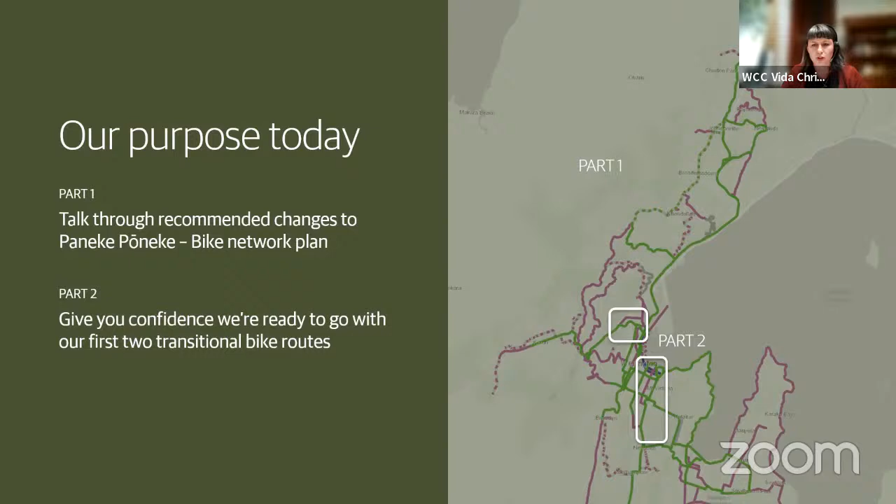So I just wanted to frame that a little bit before we get in. Ollie, if we can go to the next slide please. So as I said, the first part is around the whole bike network and the strategic document that has been in consultation. The second part of the presentation will zoom in on the 2 transition projects.

Next slide please. On the 10th of March, we'll be coming back to the Planning and Environment Committee with the finalised bike network plan for adoption, a connected network for people to bike and scoot around the city. This plan is a delivery mechanism for a number of the key strategies you have set for the city and the region over the last 3 years.

So just quickly to touch on a few of them, we know that 34% of our emissions come from our transport network. If our Te Atakura targets are to be met, creating safe and viable low carbon transport alternatives is essential, and it's one of the most effective tools we have in our toolbox to be carbon neutral by 2050.

In 2019, we approved the Bike Network Bus Priority Action Plan. One of our key actions was to install bus lanes. It makes sense to install these at the same time as we install bike lanes, and later you'll see in this presentation when Claire takes you through the transition projects that we're proposing to use this. The parking policy set the hierarchy for how our street space should be used and prioritised through the different types of streets, and this will be really, really important as the city grows.

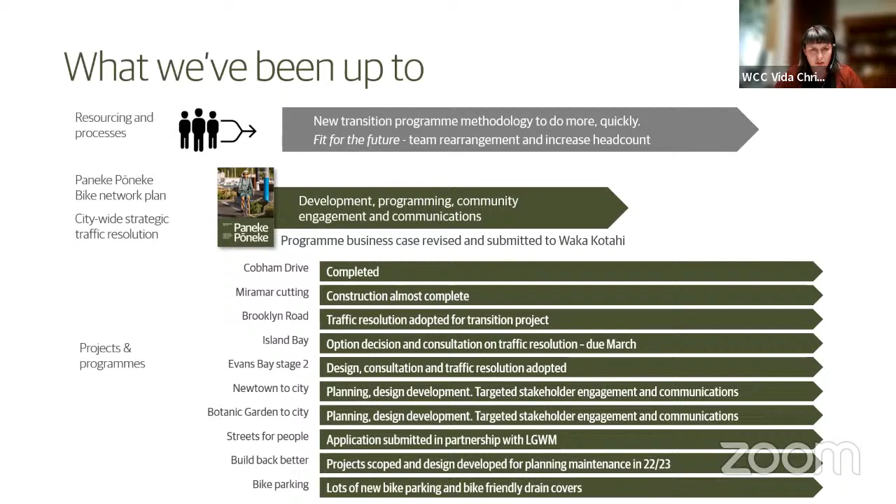And lastly, we have also continued to deliver all of our projects and programmes, and kicked off these first two transitional routes, which Claire will speak to. I'll now hand over to Joe, who will take you through the consultation and bike network changes.

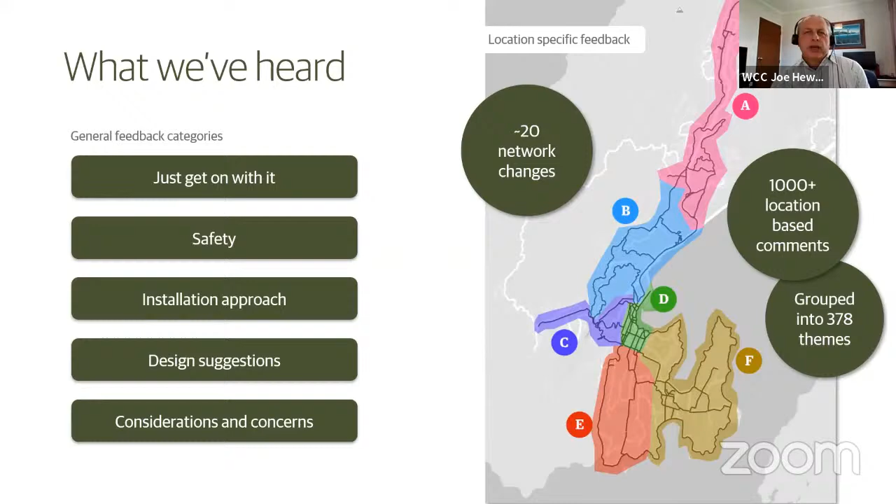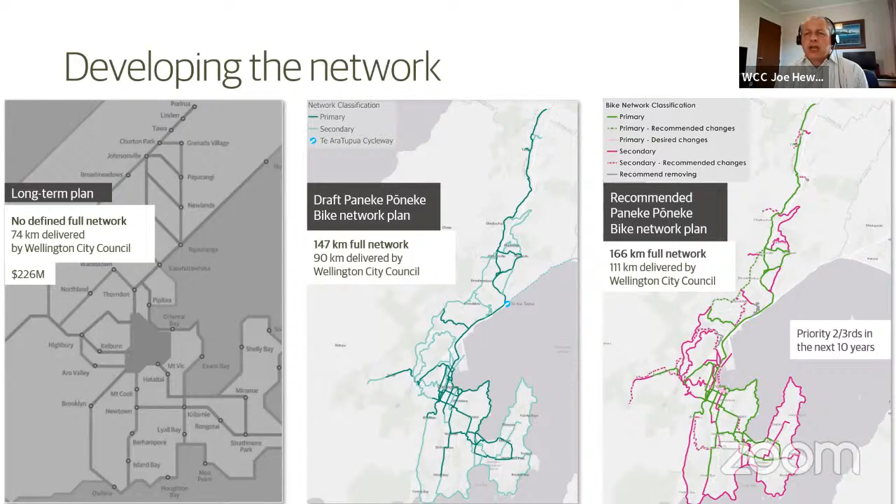Part of the decision for LTP was to refresh the master plan, through which we defined the strategic bike network, with a centerline length of 147 kilometres, of which we thought 90 kilometres would need to be delivered by the City Council, as contained in the consultation document. Our current thinking, based on recommended changes from feedback, is that the strategic network length goes from 147 to 166 kilometres, with the council responsible for about 111 kilometres. At current funding levels, about two-thirds of that network can be delivered over the next 10 years. Next slide, please.

So just breaking that down, you'll be a little bit familiar with this slide. It's a slight variation from the one you've seen before, included in the bike network plan. From the top, we've changed the built or being built from 23 kilometres down to 22 kilometres, reflecting that part around the parade needs to be upgraded. There was strong submissions about the need to provide separated facilities, particularly in busy pedestrian areas, and big shared spaces aren't by any means ideal. So that's been acknowledged, causing a change in that statistic.

In working more closely with Let's Get Wellington Moving, and now that the City Streets program is defined, we have refined the responsibility for Let's Get Wellington Moving, which still assumes the City Streets program, MRT, and strategic highways components will be responsible for delivering parts of this network as part of the Let's Get Wellington Moving program. So it's now 33 kilometres, and that leaves the remainder 111 kilometres for the City Council.

So working through the recommended changes from the top at a high level, there's some relatively minor changes around the Tawa Town Centre, where the proposed primary network was going via the existing Te Araroa pathway through Grasslees Reserve. In response to submissions, we're now recommending that it stay north on the street to get closer to the entrance of the college and the intermediate school, and also provide a secondary connection from that Grasslees Reserve area, Tawa Pool, back to the town centre.

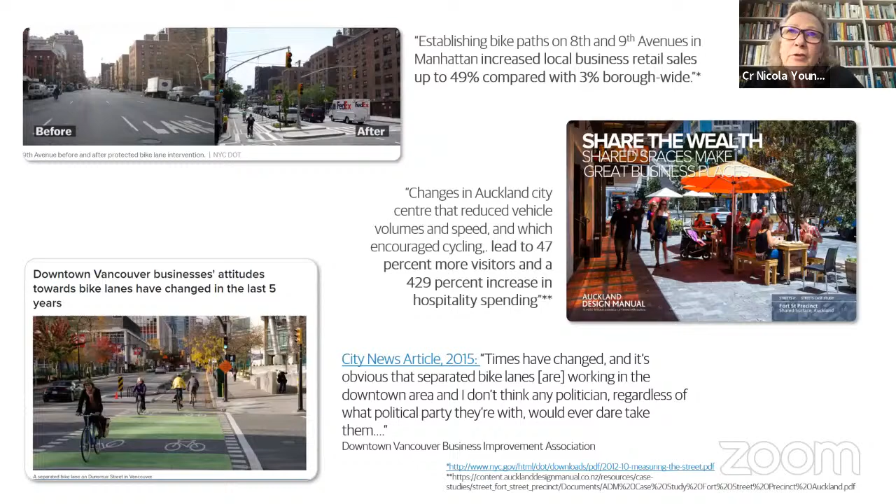I know there've been a lot of question marks about the veracity of that previously. I just find it impossible to believe that 76%, when you consider the age profile of our city — I think it's a nonsense. However, just to clarify, what it's saying is that 76% said they would use cycling more for some trips, some of the time, if good, safe infrastructure was provided. It's not saying that three-quarters of people are suddenly going to take up cycling for everything — there's no way it should be interpreted that way. But it's saying there's significant potential for more people to use bikes for some trips, some of the time.

So would it be more accurate to say would consider occasional cycling? I don't think that's what Mr. Hewitt said. Councillor, can I just ask you to moderate your language a little bit when officers are presenting? Thank you. What's immoderate about that? Just a few of your comments. Have you got any other questions? Nope, that's it. Thank you.

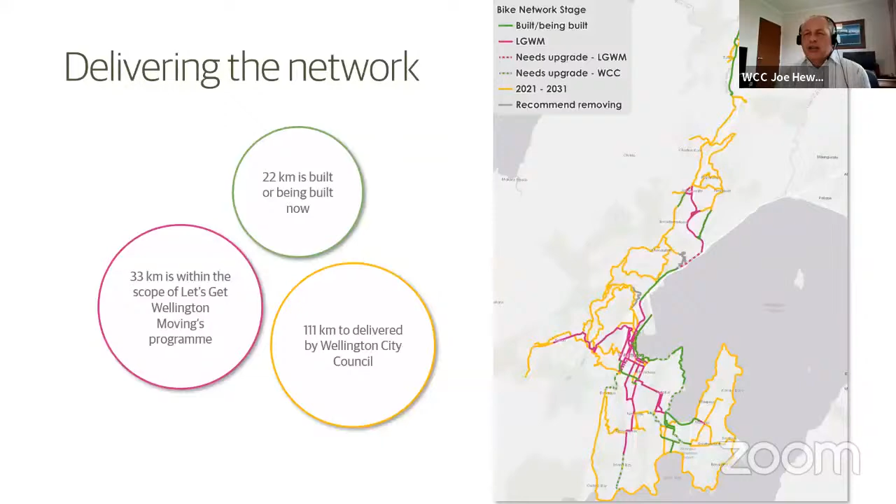Is that going to be significant? Yes, at this stage that is a significant potential cost increase. So you'll need to come back to us with that. We've identified the cost in the paper. You're quite quiet on that particular point.

There was additional cost because, of course, there are additional cycleways that we've added as part of the consultation feedback. But we've got more than enough to do with the budget you've given over the next 10 years - that's the key message. I was just wondering if you'd move things around to accommodate that.

I guess there's a couple of quick answers to that one. In terms of cyclists getting through the bus tunnel on the bus, they can do that - they just have to hang their bike on the front of the bus on the bike racks that are on the front of nearly every bus in the city these days. They're just not allowed to ride their bike through that space because of the safety concerns I've talked about before. In terms of additional connections across Mount Victoria itself, we have identified a potential route from the velodrome area, through across the top, that we are adding to our minor works program for further investigation.

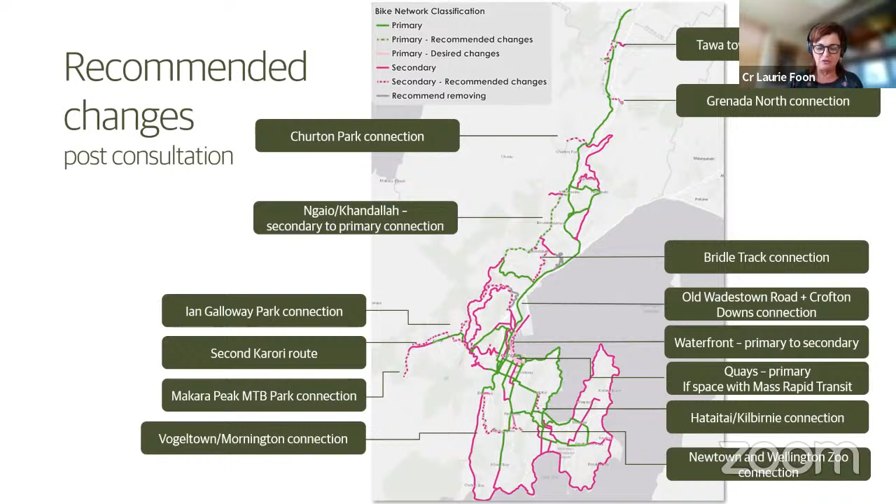Just in regard to Councillor Rush's post there about the survey, I guess one of the questions I've been wanting to ask is has there been any thought to redoing the survey, if we would or wouldn't, or when would we normally review a survey? I think it would be quite good to know - have we given any thought to that, and could anyone give an explanation about what we might do and when we might do it?

Thank you. I guess we've thought about it to the extent that it's probably tens of thousands of dollars to repeat the exercise, and I'm just not seeing the value in that kind of expenditure for something that's not telling us that much.

What we know, and we've seen this in a number of surveys around the place, is that there are different classes of people interested in cycling. At one end of the scale, you've got the fit and the fearless - I like to call them the skinny tire brigade. They'll go anywhere, kind of as fast as they can, often wearing lycra. At the other end of the scale, you've got the no way, no how people, and they're kind of a quarter to a third of people who, for whatever reason, are just not interested in cycling.

And then you've got a range of groups in the middle, which broadly we call the interested and concerned. They're the target market in terms of developing cycleways for. The safer we can make them, the more connected we can make them, the more we can attract people of that segment, which is perhaps over a third of the population. The more of those people we can attract to it, to free up space on the bus, to use their cars less for health benefits and for carbon CO2 reduction benefits, the better - that's the target market.

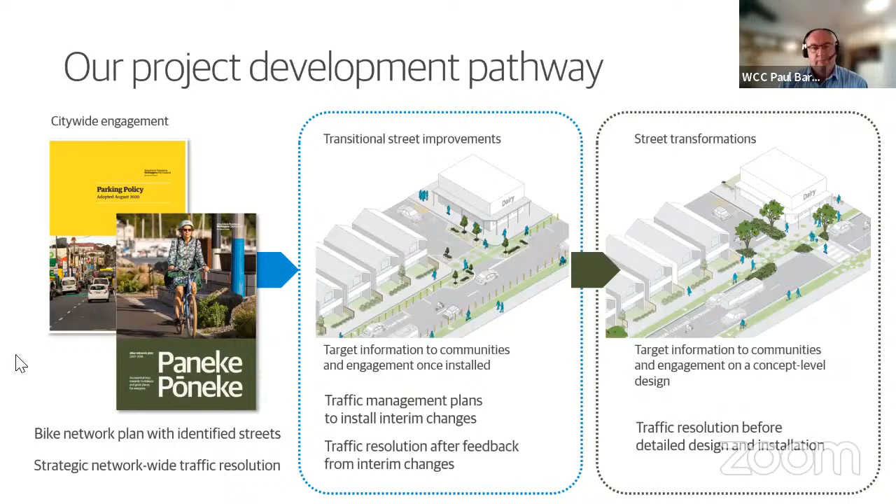Whereas the street transformation projects are almost the other way around: we come up with a design, get options from the community, and approve the paper version before we put anything out on the street. Now, by doing it this way, when we're doing the transformation, we're not starting from scratch. We're able to build upon the work that was done previously.

When we go through the program, you'll start to see that in some cases, the gap between the transitional program and the transformation program could be some years. You'll see in Brooklyn Hill, we've finished that work. We hope to get the transformation project out next year, so it's going to be about 18 months that'll be in place before we'd follow up with the long-term changes. But in some of the network, it could be 4 to 5 years that the transitional was in place before the transformation project follows through.

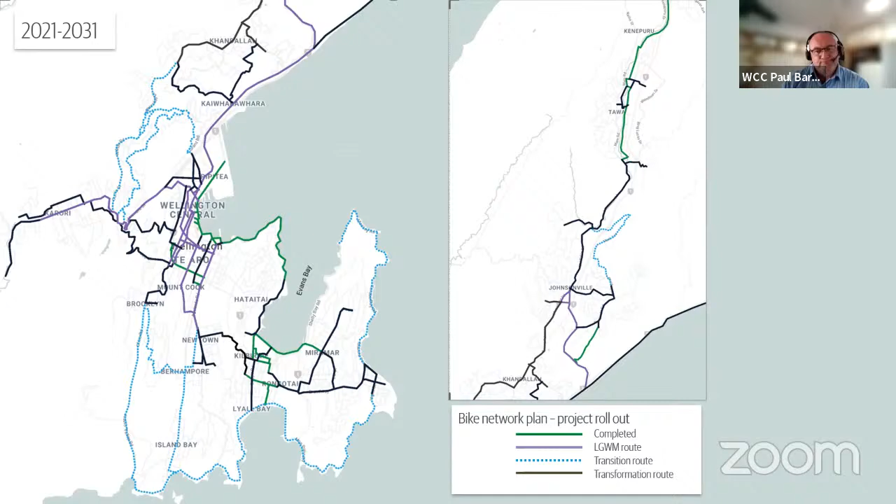Cool, just go forward those 2 more slides, Ollie. So that was the how we're doing it, and now this is sort of when, and there's a lot to unpack here. We've broken these down into about 13 areas, but within that we've projectized 62 projects across the whole city over the next period of time.

We've tried to show that the blue, the transitional program, which Claire will talk about, will get it almost all done within 3 years. There's a couple of projects that slip out beyond that 3-year program where we talked about getting it all in within 3. And you can start to see the transformational program, which is larger, more expensive, more labour intensive in terms of our contractors and our design process.

Our consultation process will take longer. And as we get further into the program, that gap between the transitional and transformational just becomes larger.

While we've tried to roll this up to area-wide, the projects that sit below it are all subject to change. Joe touched upon that in his presentation - we haven't tested yet with our partners, we haven't tested with the other service authorities the assumptions that we've made that we can get into a bit of the network. We'll have a 12-month window to build, which may be shot to pieces once we explore who else is planning on being in that bit of the network at that time.

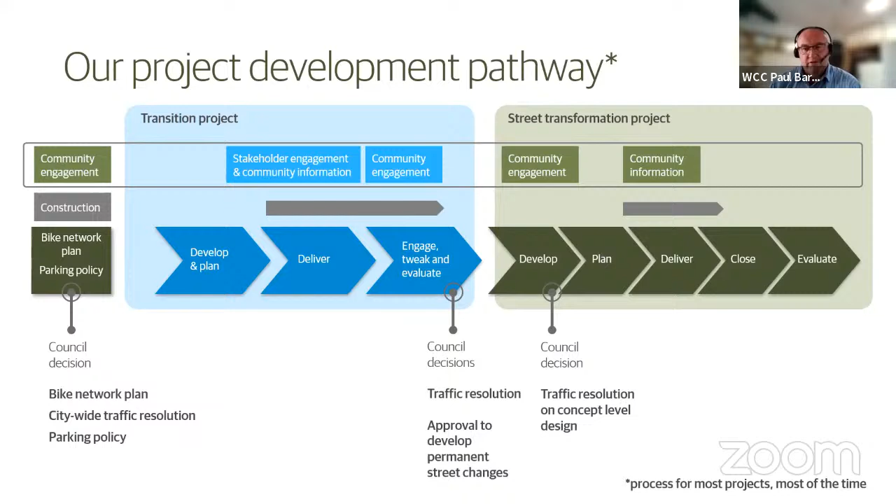There's lots of information on that. We've done a lot of work here at a strategic model level. We've built a model, and in that we've put some penalties for uptake based on gradients. That's helped us calculate the level of uptake, and even on some of our steeper parts of the network, applying those penalties, we still believe it's a worthwhile improvement, that the uptake is such that it will meet the objectives of moving us in the direction we want to go. But I will respond with a fuller response directly to Councillor Rush.

I presume keep practicing is also helpful to get better at those slopes. Right, yeah, e-bikes have made a massive difference on slopes.

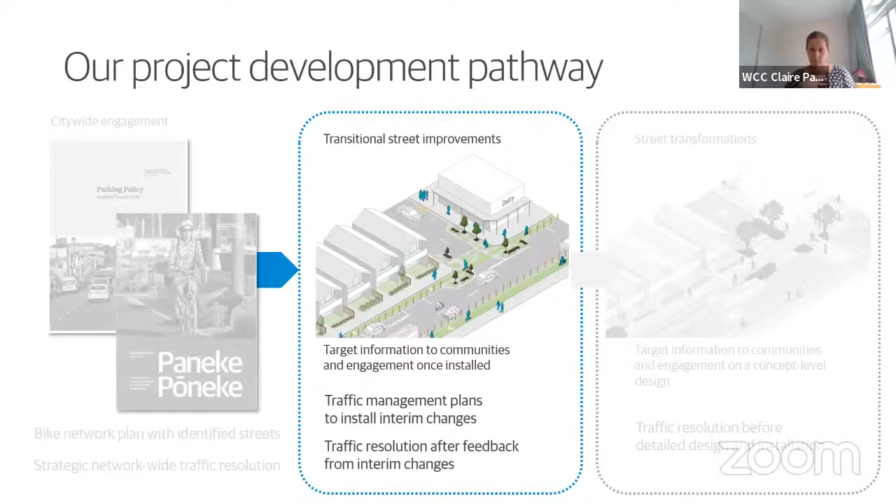But we're also delivering some good multimodal benefits through these designs, including some bus lane improvements and benefits for pedestrians who get particularly frustrated when bikes and scooters use the footpath. So creating the space to get them off the footpath is a key benefit for pedestrians.

Given that we are working in this transitional way and looking to avoid moving curbs, which is expensive and time consuming, we did require some design trade-offs and a few early preparation works, but given the constraints of the corridors, we've tried to make use of every single centimetre of street space.

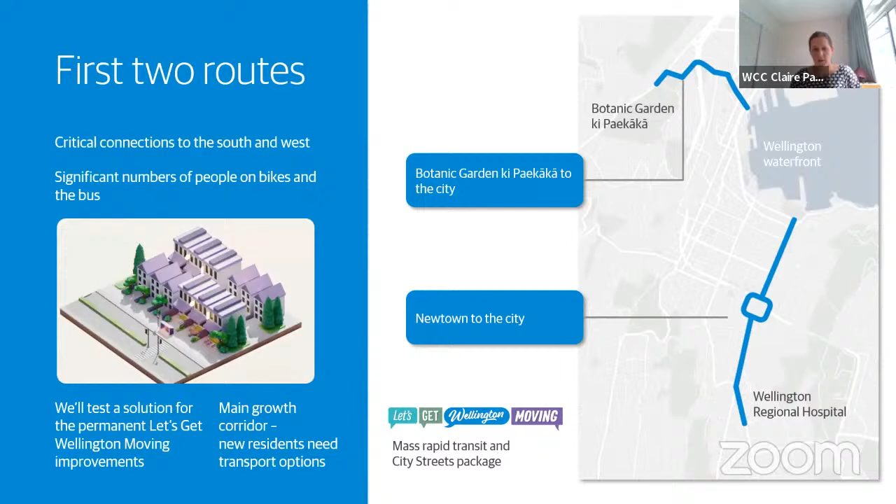A big part of these transitional projects is the data and evidence we collect. We've been pre-collecting data before we put them in, so we can monitor what the change is after we put them in. We've got good information about who's using the corridors, the speeds - we know on Bowen in particular there are some speeding issues on that section of road.

We did a public survey as part of our first phase of engagement, and got 309 responses for this corridor, with two-thirds of people saying they didn't think the street provided for active modes, and also showing pretty low trust in terms of how the council is delivering infrastructure for these modes.

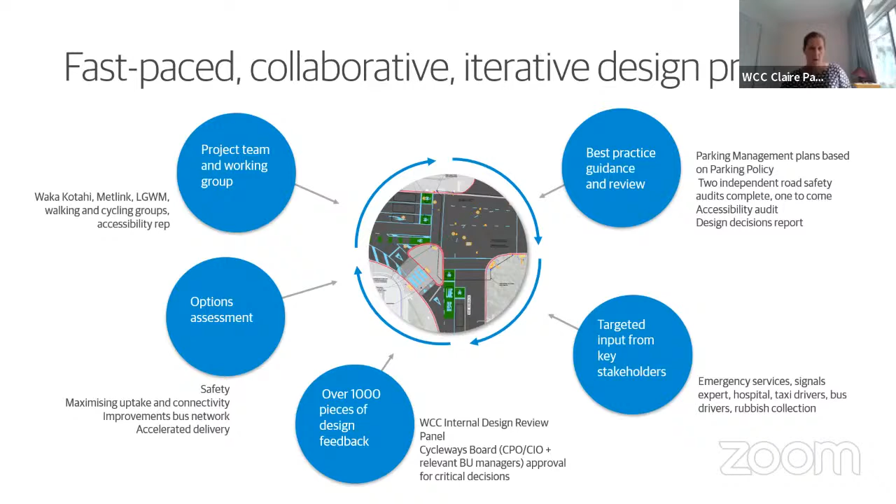So we'll get now into the designs. The first overview is of the Botanic Garden ki Paekākā to the city. This goes from outside the Botanic Gardens down to the waterfront, and it's made up of some different types of facilities.

Coming downhill from Botanic to Lambton Quay is a shared bus bike lane. That was initially going to be a separated bike lane, but some of the comments through the safety reviews have suggested that because the speeds of buses and bikes are more similar on a downhill gradient, it's actually preferred to have them sharing in a space that isn't pinned in. So that's what we will be progressing for this.

And this information again can feed into the permanent upgrades that Let's Get Wellington Moving will be following with. However, we do have a separated cycleway on the uphill from Lambton Quay up to Bowen, and that's primarily because of that speed differential between the vehicles and the bikes.

This intersection at Bowen and the Terrace has significant pedestrian improvements. This was part of the Central City walking improvements, and is introducing a new pedestrian crossing over to Museum Street. It's also raising the pedestrian island on the other side of the street to footpath level, improving comfort and safety for pedestrians.

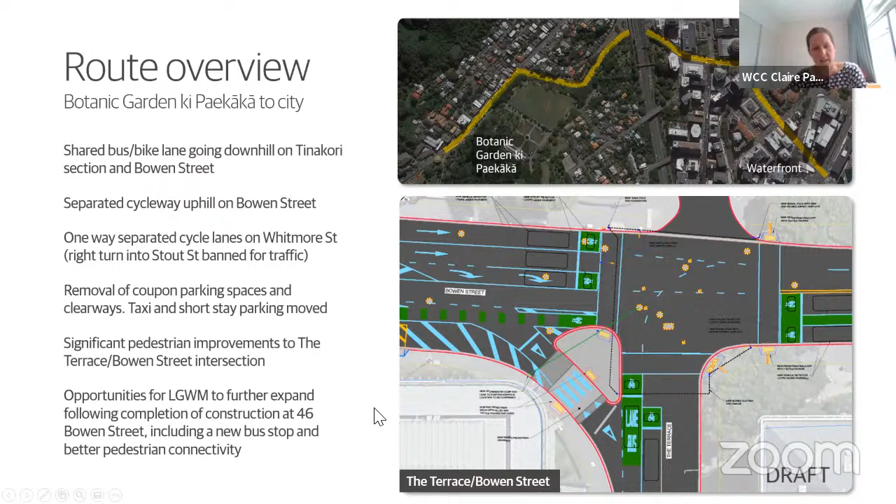This involves some permanent works because it was Let's Get Wellington Moving, but we've taken it over so we can incorporate the bike designs here as well. On Whitmore Street, we are looking at one-way separated cycleways on both sides, so we can take you through some images now.

So this is the top section, Tinakori Road. You can see the separated bike lane going up and then a shared lane coming down. It's a little unclear in the background, but there's a vehicle lane and a shared bike lane going down. This bus border—we'll talk about this in more detail later—

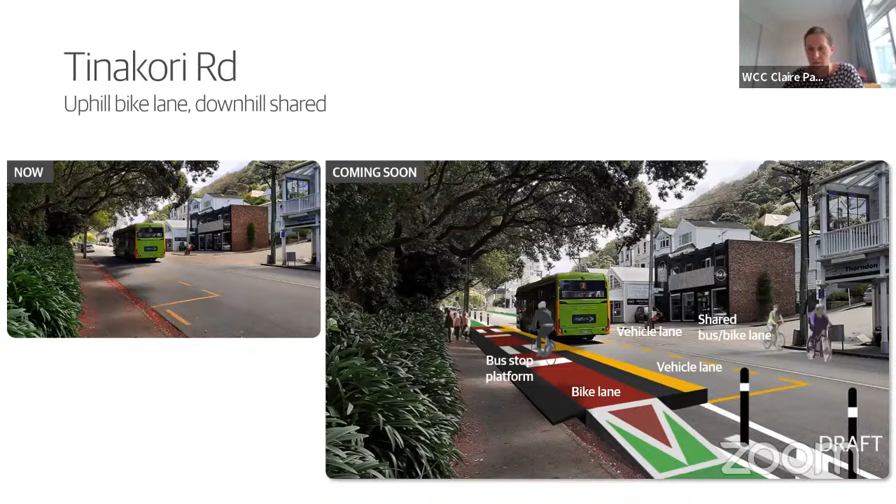is an innovative product from Spain, made of recyclable material, which has got the tick from an accessibility perspective. It's designed specifically for when a bike lane meets a bus stop, which is one of our design challenges with the widths of our streets.

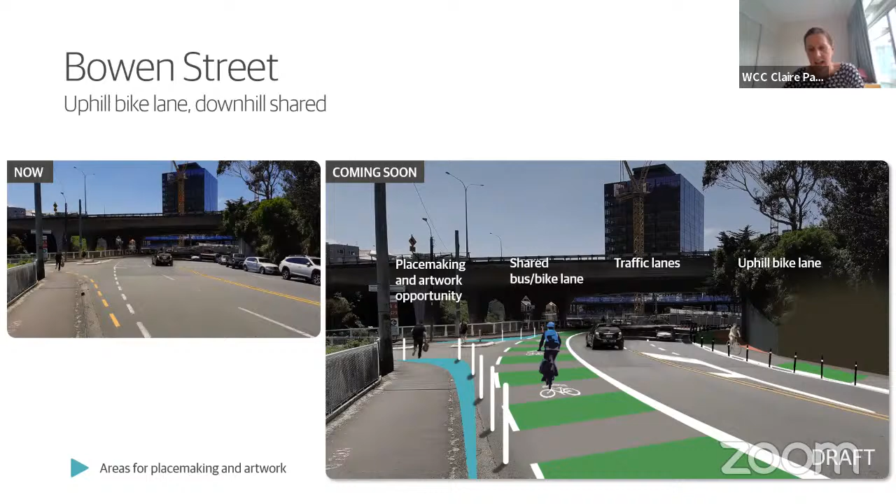This is the Bowen section, so you can see here the shared bus bike downhill with the sharrows indicating for cyclists to ride in the centre of that lane, and then the separated uphill cycle lane on the other side. And then Whitmore is the one-way separated cycleways on both sides that connect across over to the waterfront.

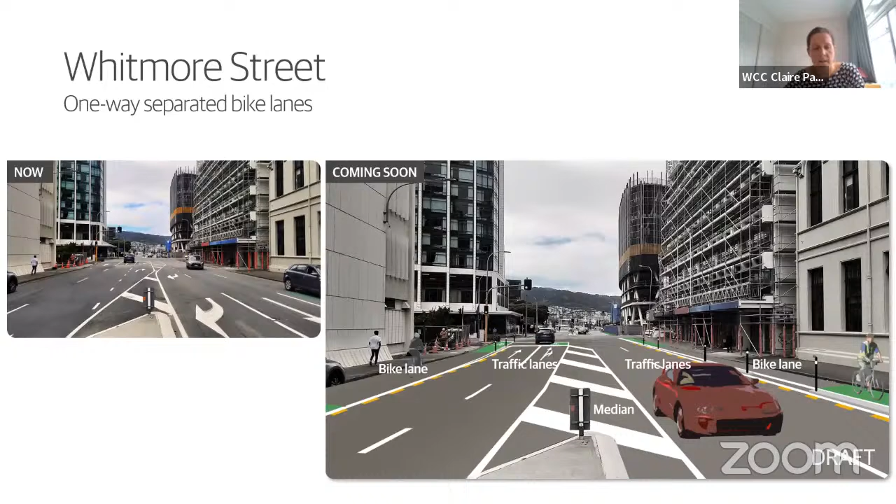Moving on now to Newtown, a lot more complexity over on this route. This goes from the waterfront to the hospital and is generally speaking in two sections: the Basin Reserve North and the Basin Reserve South.

So north of the basin, we will be introducing a bi-directional cycleway. Councillor Foon, you were referring to whether we ever use those - this is an instance where we are proposing to use bi-directional.

We have worked extensively around this Majoribanks intersection to the waterfront, and we had looked at ways to get across behind New World, but the safety auditors basically said there's no transitional way to do that safely. So we've moved it over to the Kent Terrace side so it can connect to that crossing that gets to the waterfront. Then at the Majoribanks intersection, there'll be a signal that gets cyclists diagonally across into the Cambridge Terrace side of the median.

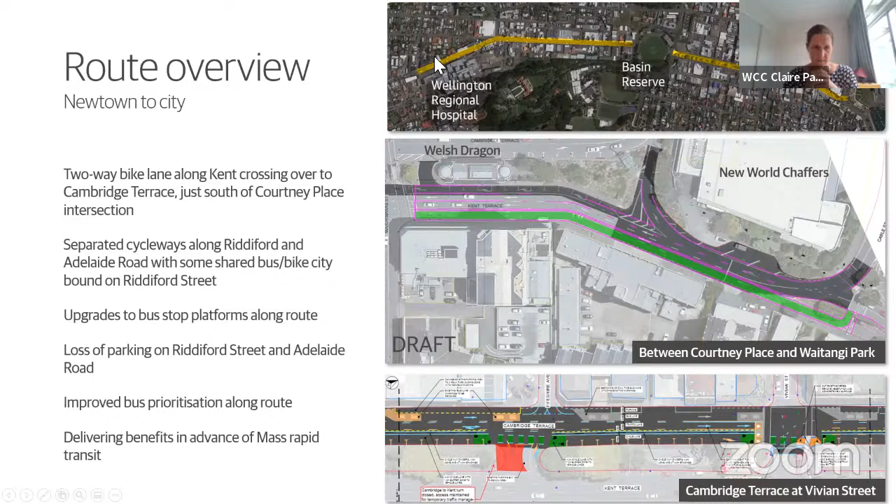We will continue to the Basin and then split into one-way cycleways on either side, up Adelaide and Riddiford. So we can give you some views of that.

This route also has significant bus lane improvements. We'll be giving more priority to the buses along here, which from an economic perspective is actually where a significant amount of the benefits come from.

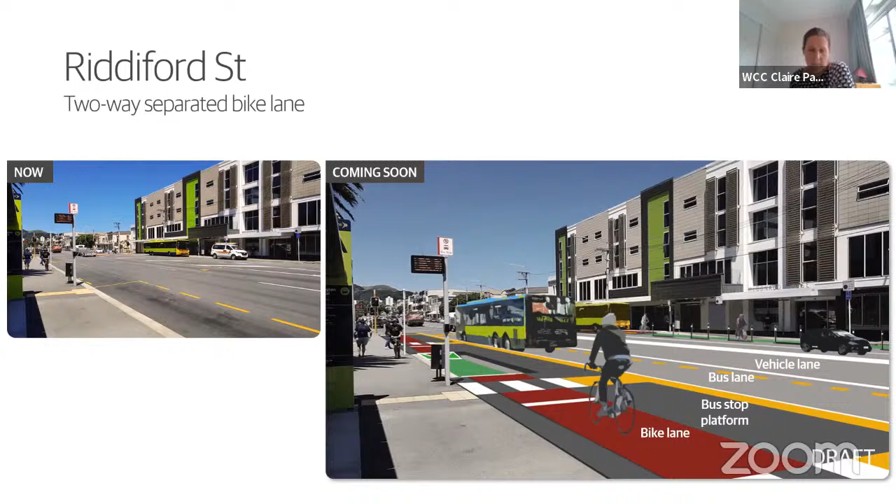So this is a picture at the hospital area with those bus borders again, and you can see the separation and then this bus stop integration site.

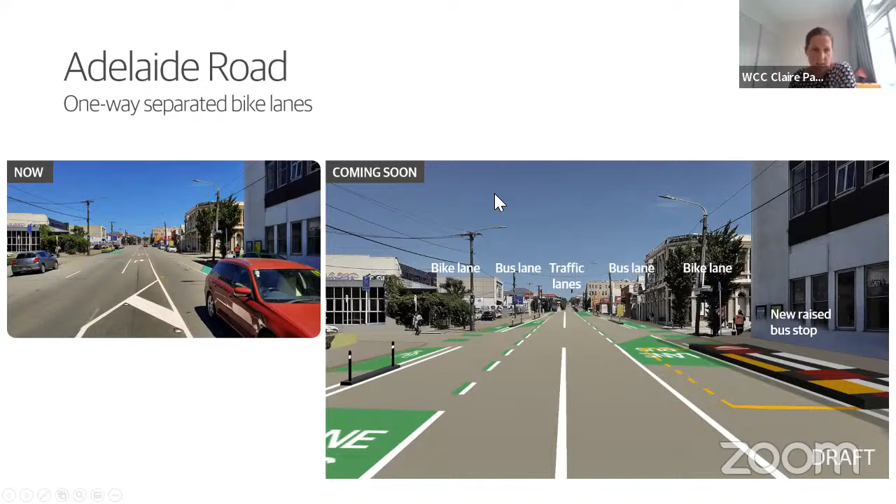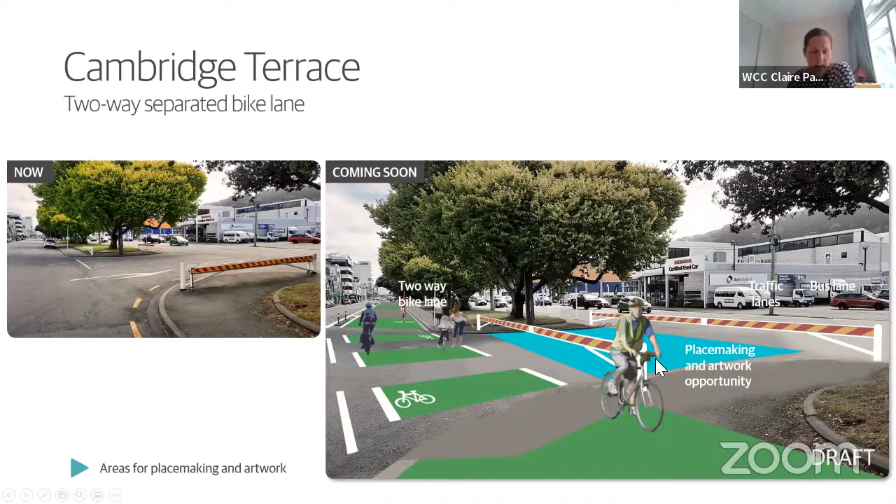Ollie, we might flick to the next slide. We have been working over the last couple of months on how we work with mana whenua to incorporate some placemaking and storytelling at cultural sites of significance along the way.

And we've been working with the Let's Get Wellington Moving mana whenua partnership group, picking up on their development values. In the next couple of weeks we've got a co-design session with some of the Māori artists who have been working on Te Ara Tupua, to see if we can bring to life some of these elements down the route where some of the awa and other areas of significance were.

So this is something that we're really looking forward to, and we've made some really good progress getting to know each other over the last couple of months.

So from a communications and engagement perspective, we've effectively got 4 phases. We are just finishing phase 1 and we're moving into phase 2. So phase 1 - we'll go to the next slide, Ollie.

Since November, we've been having a targeted introduction of these projects. We got our web pages up in November and we started our high-level business engagement with First Retail, where they basically went and let everybody know something was coming. Of course, we didn't have the designs at that point, so we didn't know what. But that was where we compiled that list of stakeholders along the routes.

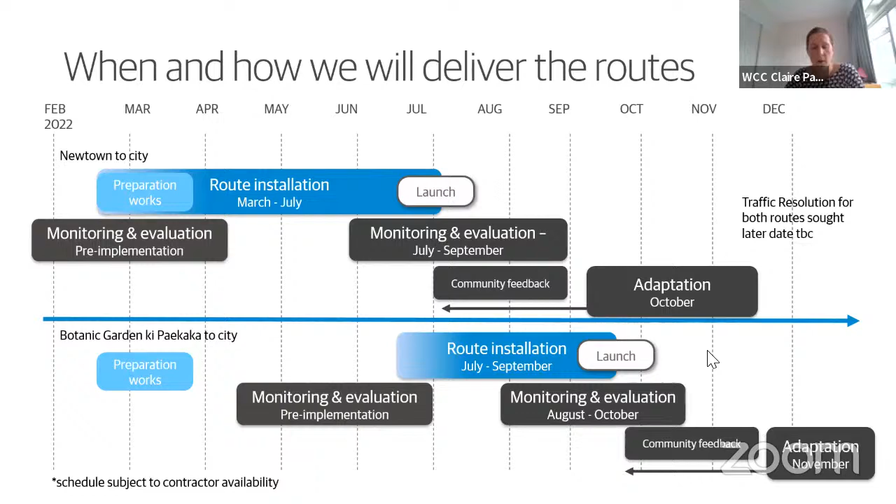As I've mentioned a few times, monitoring and evaluation is really critical for these projects. We're trying to get very clear on what exactly we're measuring in terms of success. Our primary indicator is the percentage of low carbon transport trips — that's what these projects are all about.

We'll be looking at who's using the streets before and after, and also the diversity of users — for instance, more females riding bikes, or more people with mobility issues finding it easier to get around on the footpath. We'll also be monitoring safety, both actual and perceived, which we know is really important for cycling.

And we'll be measuring whether we're delivering these quicker than we have in the past, which we know is really important to you — how do we actually get these things done. So we'll be tracking how quickly we're moving as well.

Just to give you a quick sense, almost finished, of what we'll be adapting. Once they're in, if there are immediate safety concerns, those will be addressed urgently, so anything we haven't quite got right will be tweaked.

Then if there are some absolute no-brainers coming through the public feedback that we also agree we haven't quite got right, we'll be trying to tweak those as well.

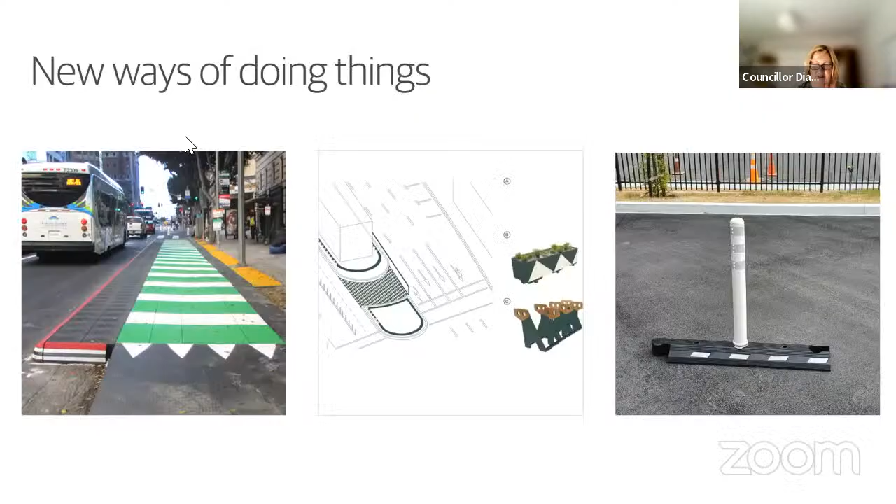Thank you. I'm just referring to a slide a couple back where you talked about adaptation and being able to adapt, and how people are adapting, in particular to COVID. How has the program of work adapted to what COVID has brought about in terms of changing patterns of how people use their places, the central city, the suburban area? I'm just keen to understand that. My second question, again relating to adaptation, is that when this was set, this was without the impacts of COVID and also potentially on the finances of the city. If you're procuring resources, is this impacting on other infrastructure projects that we also need to fund and resource?

Yeah, thanks for those questions. In terms of how this program is adapting with COVID, it's important to remember that a lot of places around the world have actually instigated this type of work as part of their COVID response. When COVID hit, public transport patronage took an absolute dive, and that happened in New Zealand as well. Without people feeling like they have public transport as an option during COVID, it really leaves them with not very many options. In terms of affordability issues with petrol and everything at the moment, building these socially distanced, affordable ways to still get to your local shops or into town has been a primary part of how cities have adapted. While COVID hasn't, in the last few years, we've been extremely fortunate not to have that acute issue. I guess now that we're starting to feel it, this is starting to be really relevant for us as well.